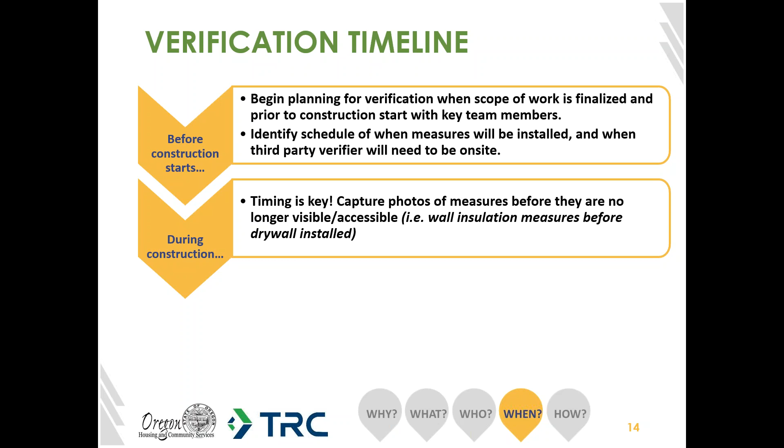During construction, timing is really critical here and is key. It's important to capture photos of the measures before they are no longer visible or accessible. This is more so important for envelope measures, for example, trying to take photos of wall insulation before the drywall is installed and no longer visible.

Then after construction is completed, you should assemble the verification submittal documents we had shown earlier: the photos, the measure verification form, and the invoices, and submit those to your project's OR-MEP energy advisor. We will review that on our end, and once approved, we can issue the final incentive.

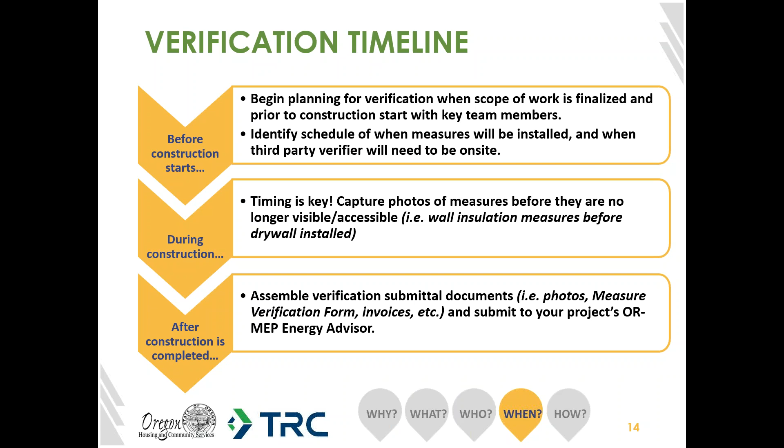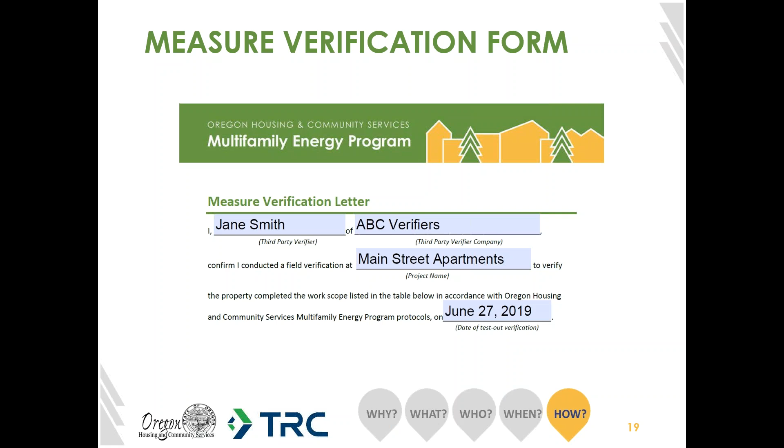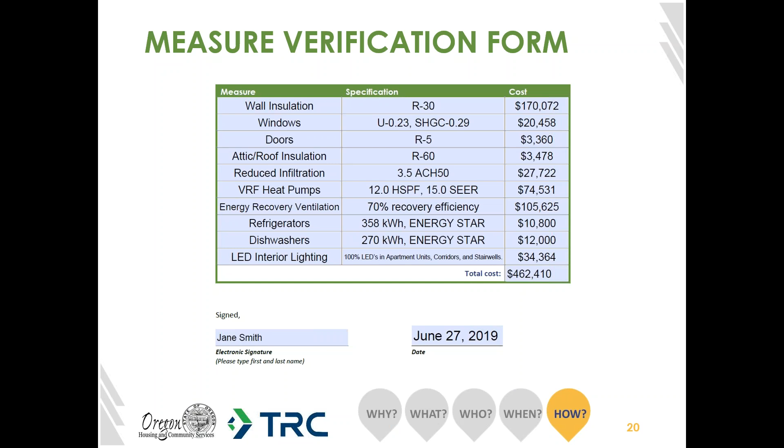Moving on to invoices. Invoices should be submitted to back up the costs noted in the verification form that we just saw, so we ask that you submit invoices with the total cost for each installed measure. We certainly understand that collecting invoices can be complicated and complex. We don't want this to be a burden.

If the invoices are complex, we will allow you to instead submit a summary of the labor and material costs for each installed measure on the participant company's letterhead. If you have any questions, feel free to reach out to your project's energy advisor if you're unsure of what type of documentation is acceptable. We're always here to help.

The reason we ask for invoices is to confirm the measure costs are greater than the project's eligible incentive. Since the program is funded through public purpose funds, we want to be sure the funds are being used as intended. Finally, getting the total cost of the measures provides us with as much data as we can get on the actual cost you as a project are incurring to install these measures. This is important data, and it gives us an opportunity to reevaluate the program's incentive structure and consider incentive changes to better cover the costs of these measures for your project.

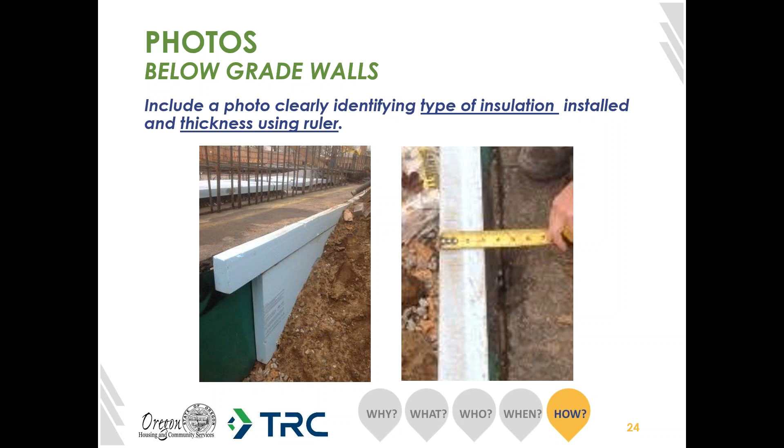So here is an example of the photos we would expect to see for below grade wall installation. We ask that you include photos of the type of insulation installed, and then a picture of the thickness of the insulation using a ruler.

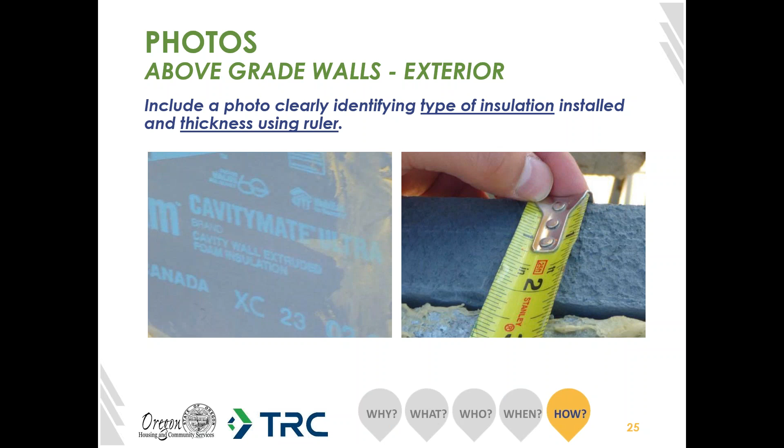Similarly for above grade wall installation, please include photos clearly identifying the type of insulation installed and the thickness using a ruler or measuring tape. When providing thickness measurements, it's helpful to zoom in on the measurement so it's clear. These photos show examples of exterior wall insulation, and if there are different wall types or different insulation levels, we would just ask that you provide photos for each unique wall type.

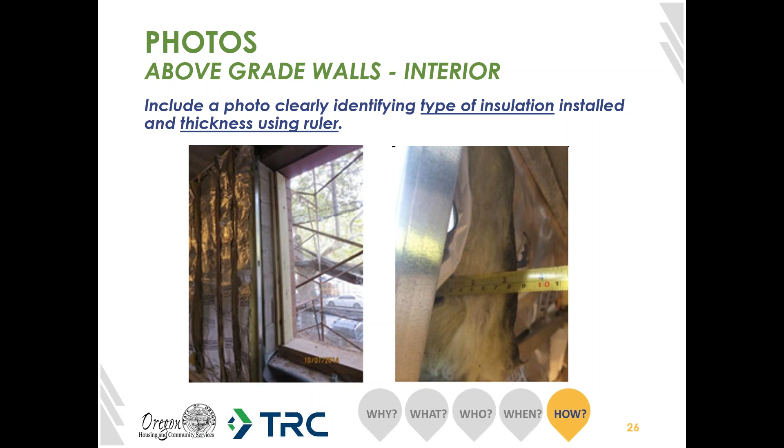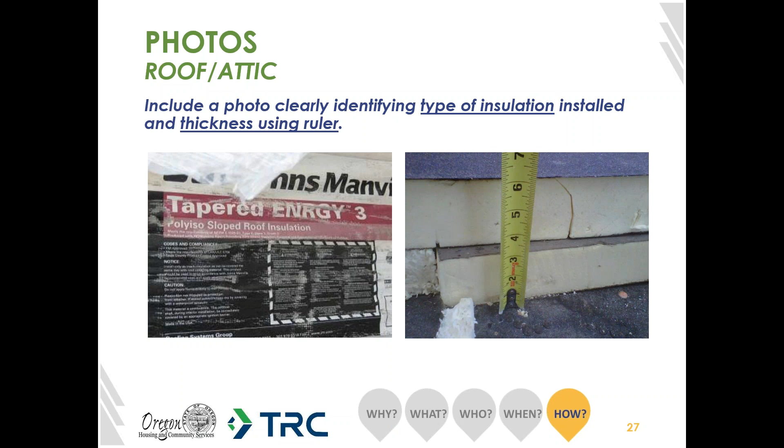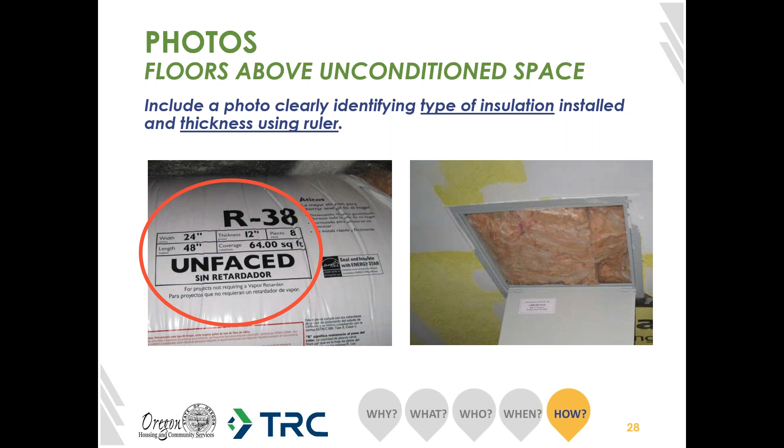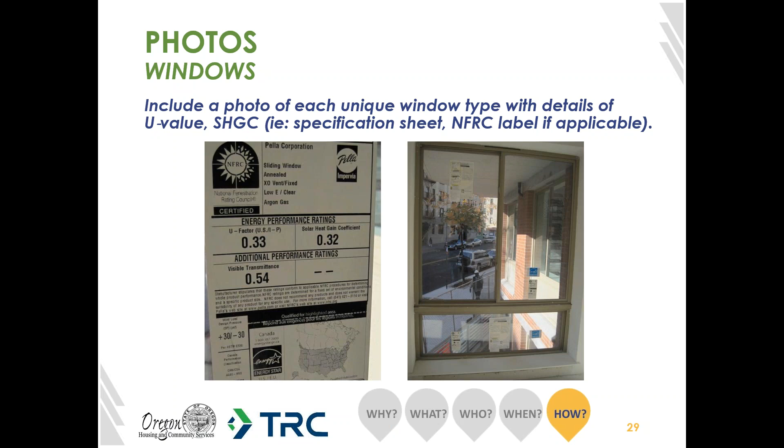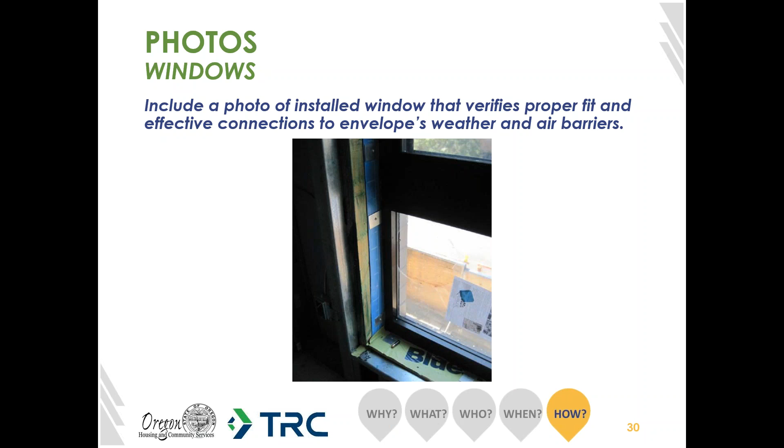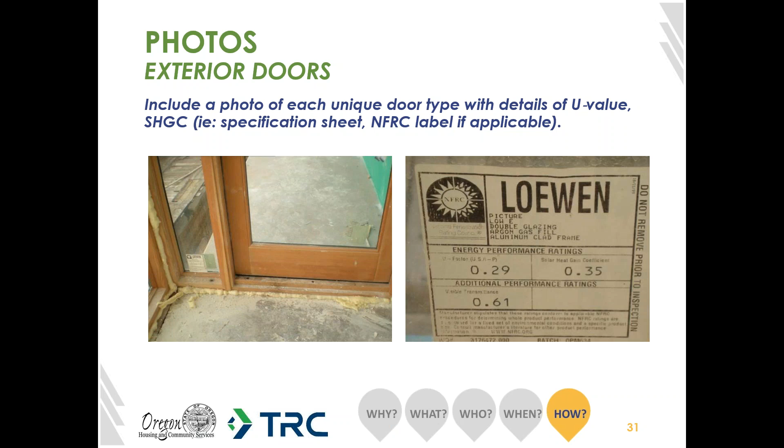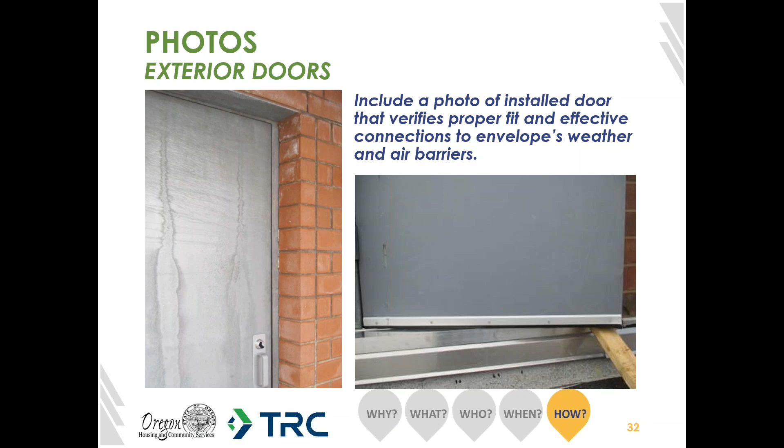Okay, now moving on to air sealing. For projects proposing air sealing improvements, we want to see photos of the air sealing strategies implemented, and that can vary from project to project. These are just some representative pictures of typical examples of air sealing measures, but we understand some of these may not be applicable to your project.

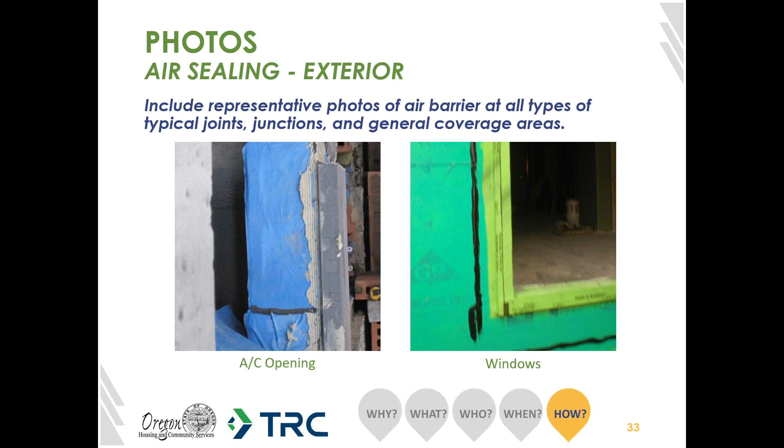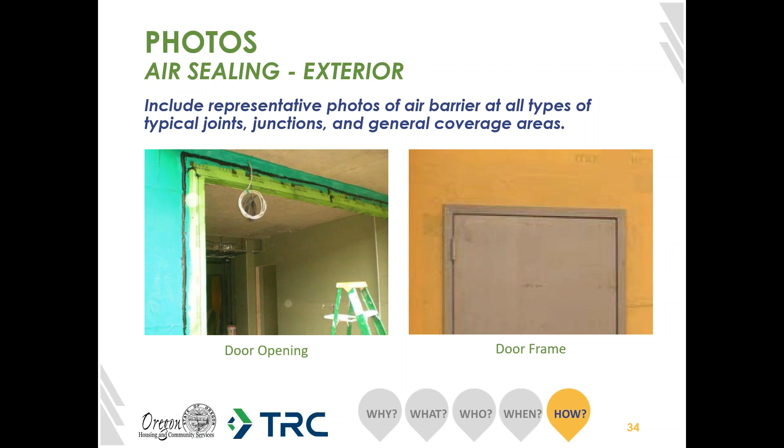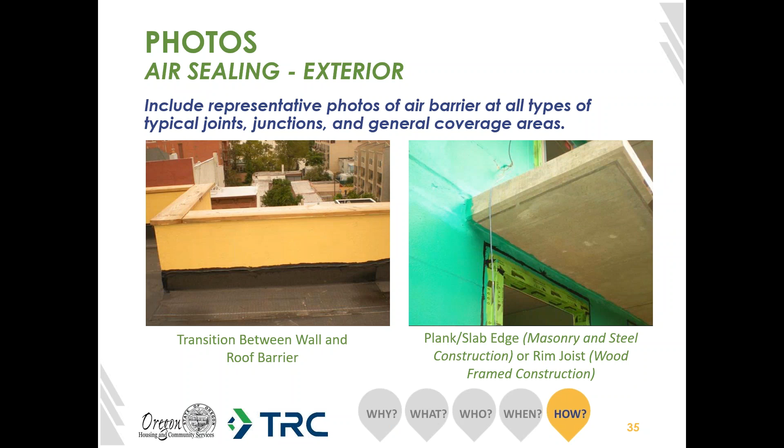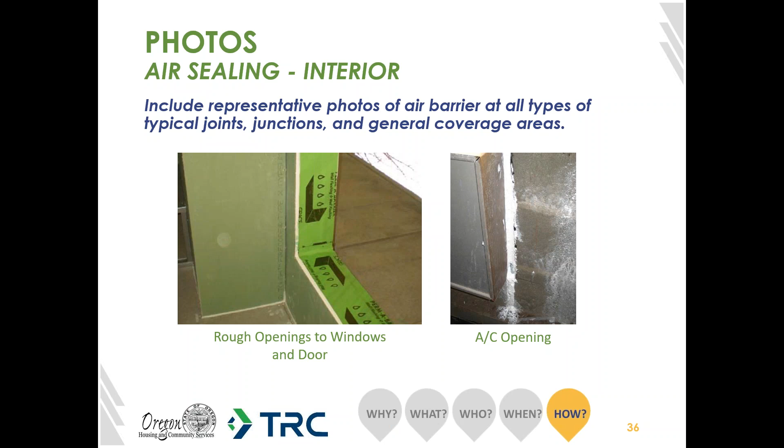Moving on to the interior side of things for air sealing, we want to see examples of air sealing strategies at joints and junctions from the interior as well. On the left is showing the rough openings to windows and doors, and on the right shows an example of the sealing around the perimeter for the AC opening.

Here are some more interior air sealing photos showing more finished conditions. On the left, more window details and the connection of the window to the interior gypsum board. On the right, the AC sleeve sealed to drywall.

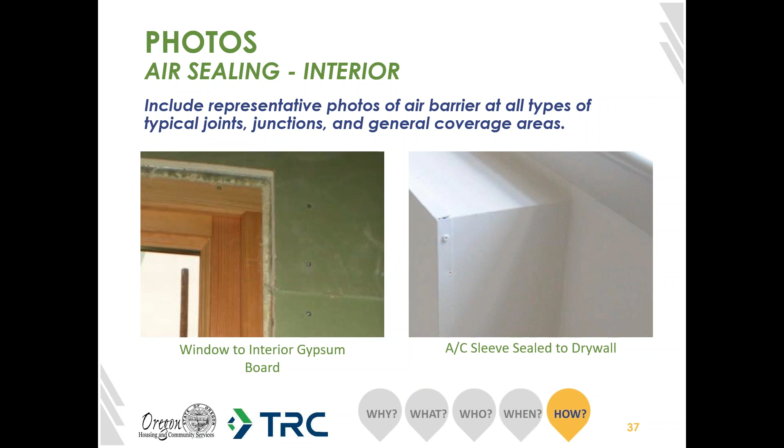Continuing on with interior air sealing, we have typical penetrations that contribute to air leakage that should be checked for. On the left, the outlet and electrical boxes located on exterior walls, and the right shows piping penetrations through interior and exterior walls.

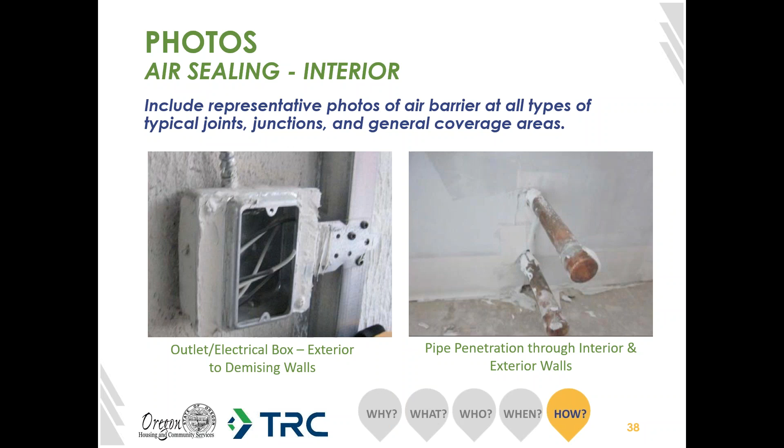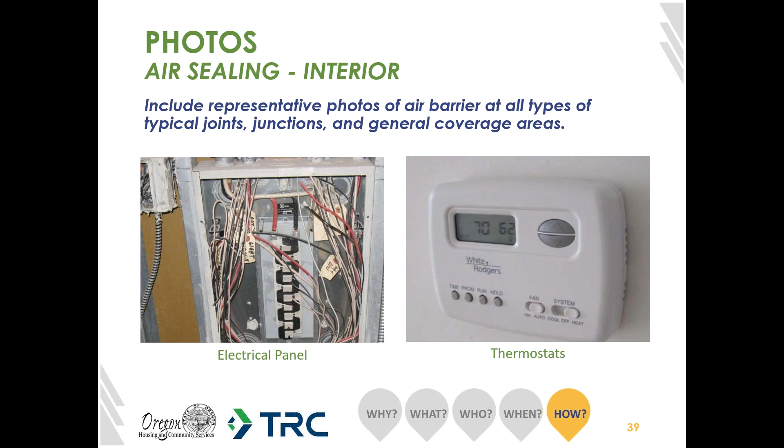Continuing on with other sources of air leakage, on the left are electric panels, so you can demonstrate air sealing strategies there, and on the right, thermostats as well. That concludes some examples of photos related to air sealing.

With that, we did want to make a note about blower door testing. Overall, the program does not require blower door testing. However, it may be necessary for projects with high infiltration reductions where air sealing is contributing to significant savings. For these projects, we'll identify them on a case-by-case basis and work with the project teams directly. But in general, the program does not require blower door testing.

However, we do encourage you to complete blower door testing and recommend that it be completed, as it's really the only way to effectively verify that proper air sealing is completed and that the savings you're expecting is realized. It's also a good way to ensure your building is properly air sealed to extend the life of your building. However, we do understand that blower door testing is time intensive and potentially invasive for residents in existing properties.

So it's not a requirement. As we mentioned previously, if you're participating in another sustainability program like Enterprise Green Communities or Earth Advantage Homes that require blower door testing, we encourage you to maximize those efforts, and you can send any blower door testing results for the purposes of the multifamily energy program instead.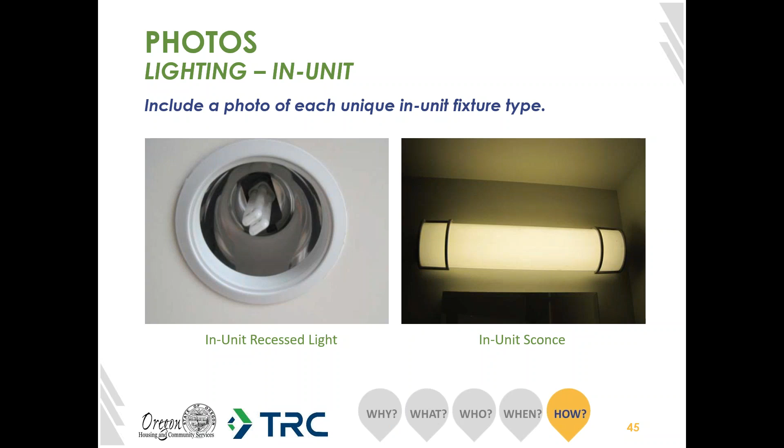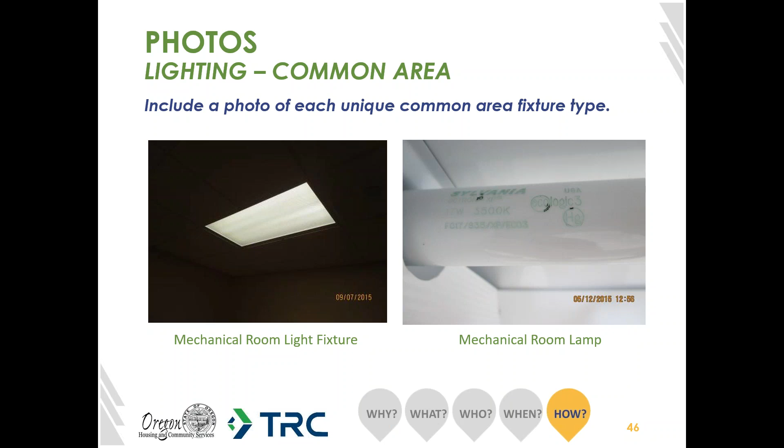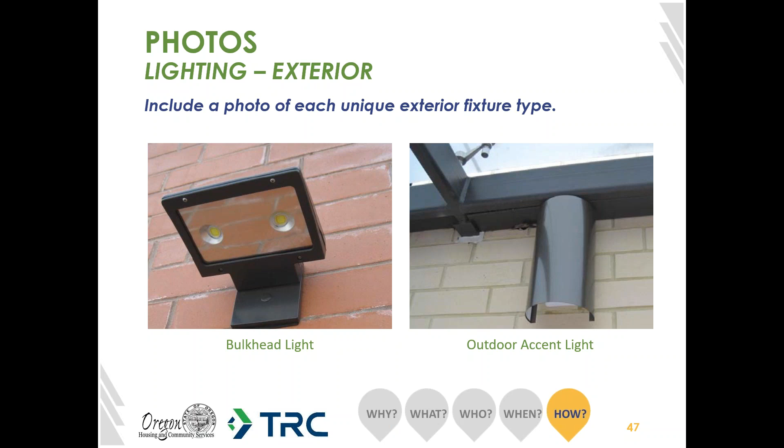Additionally, for exterior lighting, a photo of each unique exterior fixture type is needed. The left shows a bulkhead light, and the right shows outdoor accent lights.

If you have lighting controls proposed as a measure, for example controls in the corridor, stairwell, or common area spaces, we ask that you submit a photo of each type of lighting control in each unique space. Please also make a note of the space it's serving, either in the photo template notes or in the file name for the image.

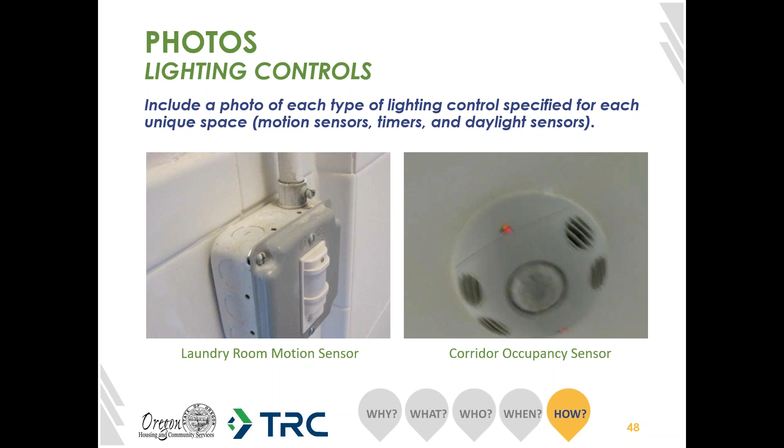So that concludes our presentation on verification protocols. I'll pause for any questions. While we're waiting, I'll note that we understand every project is unique and has different measures and circumstances. So if you have questions on what exactly we are looking for on your specific project and measure, please feel free to reach out to me or your project's energy advisor.

And with that, I will check in with Matthew if we have any questions.

We were asked, do pre-construction photos need to be provided alongside post-installation photos? For existing building projects, we don't need the pre-construction photos provided alongside the post. We will have captured that in our technical review with the proposed work scope. So right now, for the verification stage, we only need the post-installation photos.

Okay, thanks for that question. All right, I think we have another question.

It's asking, if a photo is missed, say for example wall insulation, and then the drywall is covered, what are the steps to move forward? If you do run into that case where you may have accidentally missed capturing a photo, let us know as soon as possible. Our hope is with this presentation that you're more aware of trying to capture those photos, but just reach out to us and we can figure out the next best step to verify that, whether it's just confirming with the contractor.